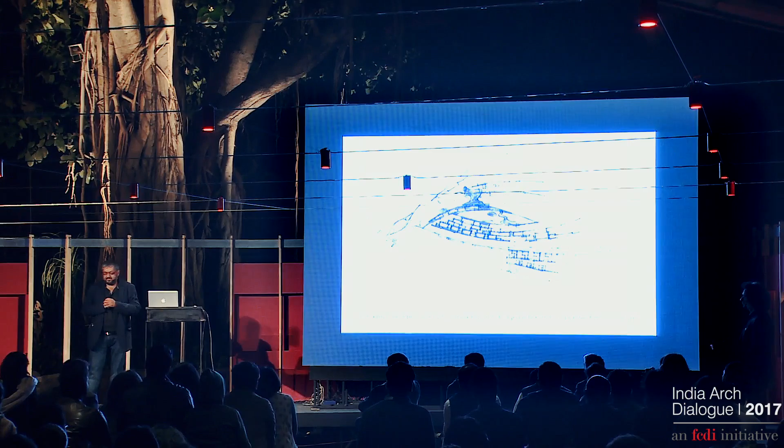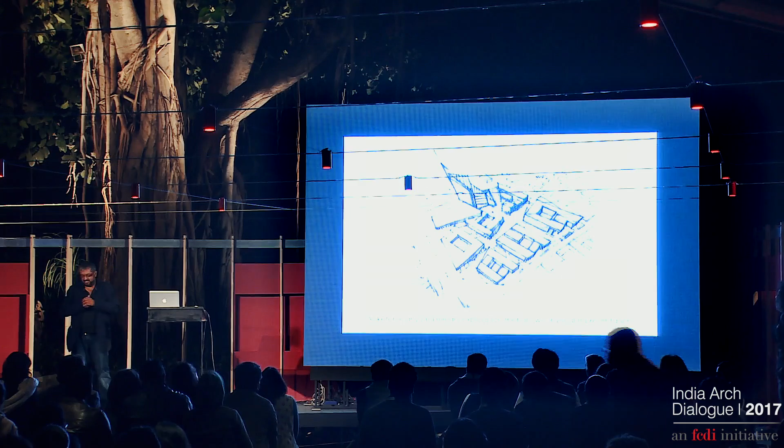The capture of work is quite diverse, primarily arriving out of most of the work done conceptually at the stage where we do a lot of hand drawings myself. I spend hours together trying to capture lines and geometries and envision what can happen. Projects such as this, where Cummins invited me to do a large sculptural pavilion, which never happened, or projects where we've lost as competition, where we had to understand the genius loci of the site, or a capture of 42 acres of land for Wipro, which we are doing as a large IT hub.

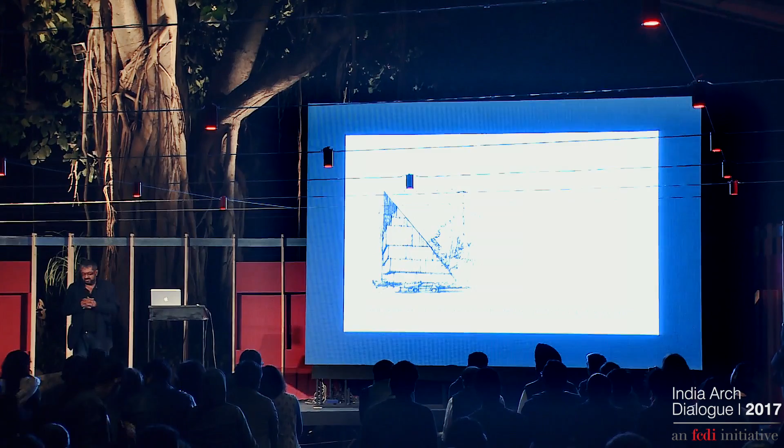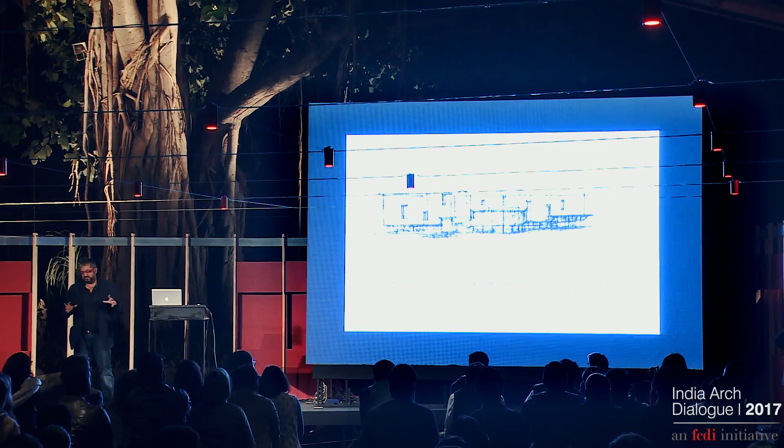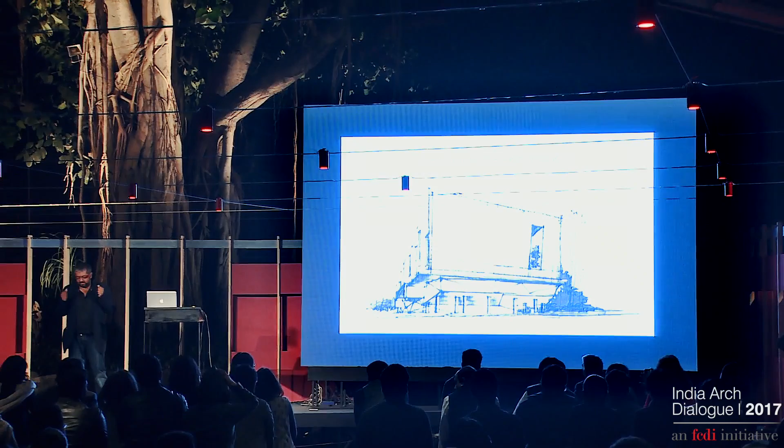In all this, the experience of using charcoal or pencils or shades of felts to sort of inundate the idea of making it, the idea of composition. There's a whole dialogue that happens which is multicultural and also has no barriers of verbatim or any kind of text, but it's all the sense of experience and what we think is at that point appropriate and the learnings that we all imbibe internally to what we want to do.

This kind of a process, which is probably stretched for almost an hour and a half sometimes to draw - this was the master plan geometry, sort of a connection that Wipro had asked us to do between two wings of a campus. And how does that originate? Doodles and out of ideas.

Sometimes you have to redraw. You have to draw the same thing time and again to get the accuracy and the quality right. And as you draw, I think I experience the qualityness or the accuraciness of how it can be better. And for me, more than trying to discuss or trying to discover through dialogue, drawing helps me to understand how I can do that better in the making of it. And that product starts communicating for us the idea of making and takes that direction to perfection, hopefully.

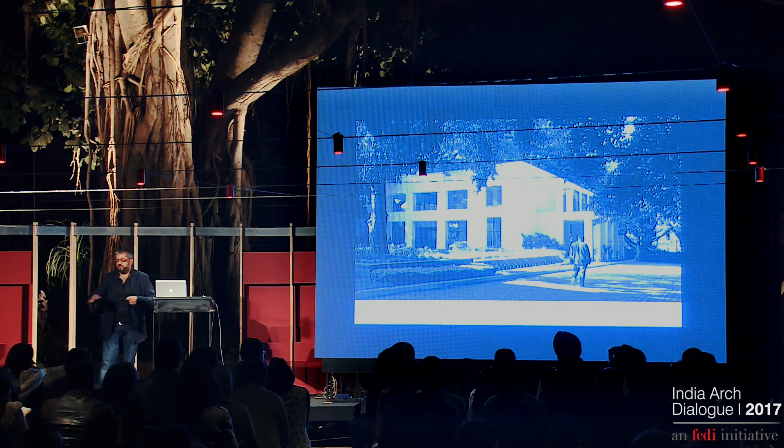The interior spaces which hosted the exhibits, how you would walk into the exhibit space, how you would experience the landscape - Bangalore's weather, climate, and the textures of landscape - became very important. The art gallery itself is 70,000 square feet, naturally lit internally, with multiple walls which can move, change, and reformat themselves to accommodate different kinds of artwork.

The old building hosts the permanent selection. We restructured the flooring, the walls, the ceilings. Nothing was removed from the site. A few elements were added back, but still one could recognize when it was done, and in that weave, the architecture was completed. This is a project which we worked as Pragroup.

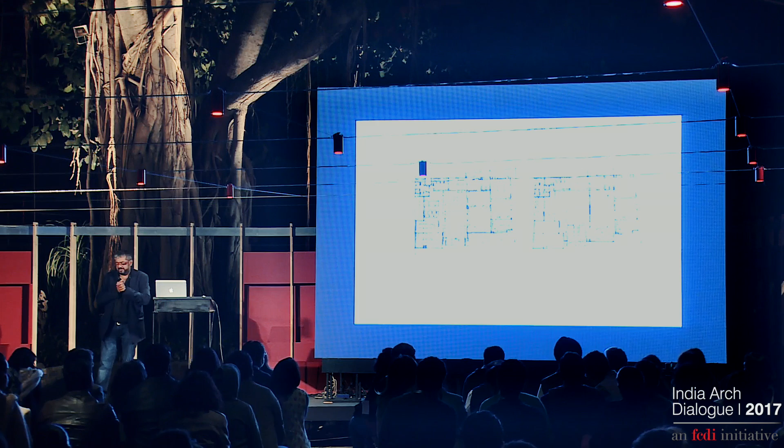It's a kind of a prototype for a school, called 1,000 Yogas, where they will be building these pavilions around the world. It actually teaches students to become teachers, to become yoga gurus.

Again, the budgets were limited. We wanted to use material which could be common to any part of the world. We used very common elements but kept the same material repetitive: the wall, the floor, the ceiling, the skins, the parallel walls, the fenestration, edge lines.

And also the parallel screen walls which would act as shading devices were all made out of brick. We used minimal mortar, where only the horizontals had mortar and the verticals did not. So there was a sense of saving in making this kind of space, and being conscious about cost, and how the furniture could weave itself as a natural material space with the bricks and the cotton elements on the edge line.

That's the courtyard, which is the central space, with pavilions of classrooms around it, meeting rooms and smaller discussion areas, the waiting lounge, and terraces where people could practice outdoors. There are intimate rooms where 3-4 people could be taught with one teacher, and a large hall space where 80 to 100 people could sit together and practice yoga.

So in a way, the color was always constant, and there was no plaster, no texture, no addition to the surface—everything was kept natural. We realized that this one material can be common to most parts of the planet, and it's very easily malleable, and you could easily articulate this idea in any other situation.

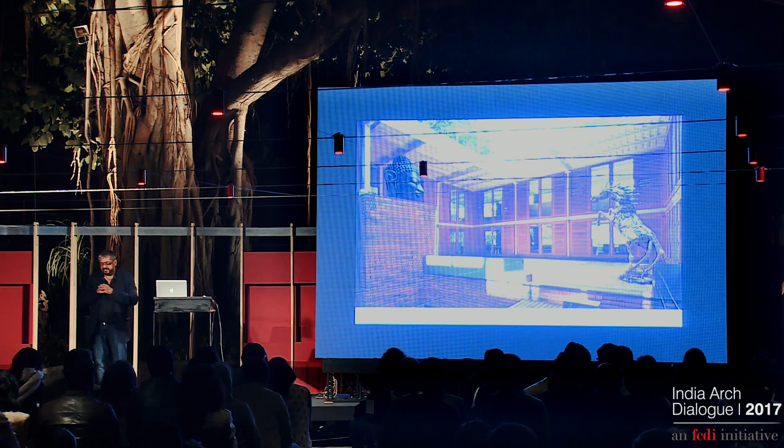We created these 2 houses to collaborate together to create a giant courtyard using their setbacks in between, used the terraces as another layer of the courtyard, and made timber as a load-bearing element.

2 floors above, the last level is all in wood, and it hosts a large amphitheater. We love music, and we've almost managed to host a concert every month in our office, inviting 200 people, and we enjoy it. In all this kind of space, it's just 2 materials—timber and steel—where together they act as a load-bearing structure to host 5 floors of elements above.

The architecture and the experience was, for us, similar to what we do, whether it's a large campus or a small studio space for yoga, or whether it is to work as an architectural practice space. The sense of arrival, to meander, to disappear, to be able to hide, to be able to be seen, and also to celebrate, and to be symmetric and processional in the geometry of that room becomes significantly important.